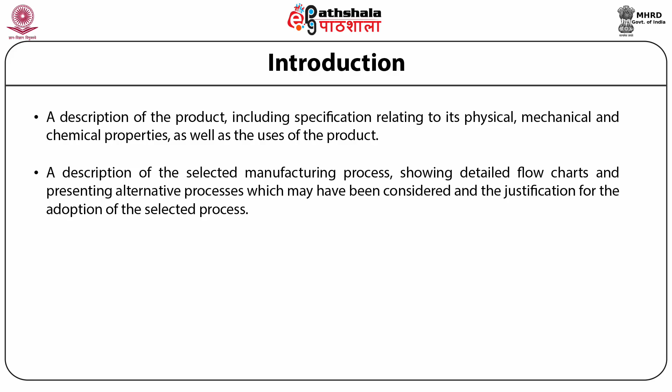A description of the selected manufacturing processes showing detailed flow charts and presenting alternative processes which may have been considered, and the justification for the adoption of the selected process. A determination of the plant size and the production schedule.

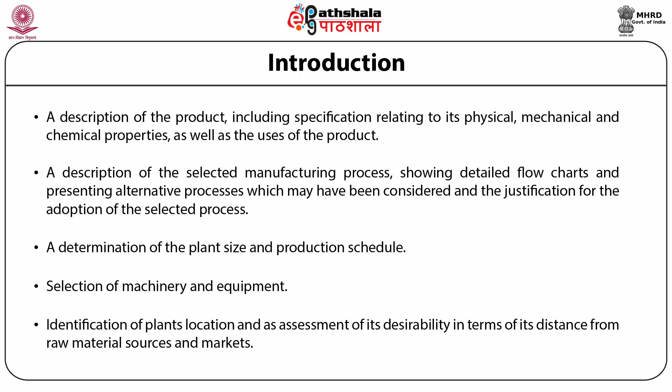Selection of machinery and equipment. Identification of plant location and an assessment of its desirability in terms of its distance from raw material sources and markets. A design of the plant layout and an estimate of the cost of erection of the proposed buildings and land improvements.

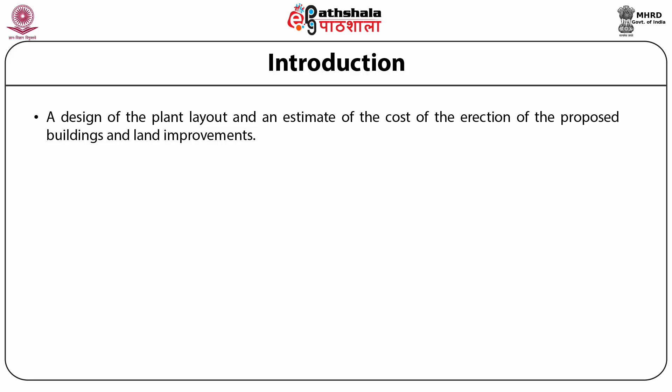A study of the availability of raw materials and utilities, including a description of physical and chemical properties, quantities needed, current and prospective costs, terms of payment, and location of sources of supply.

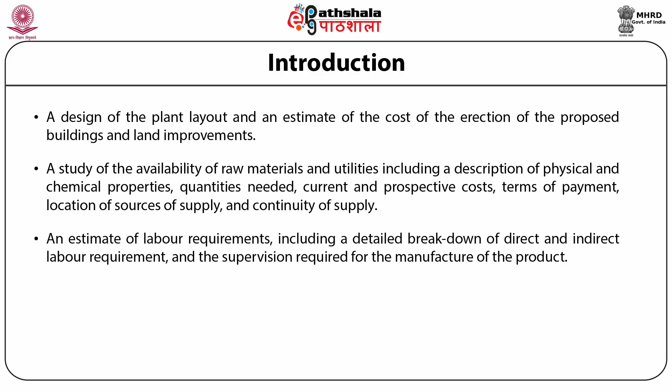Continuity of supply. An estimate of labor requirements, including a detailed breakdown of direct and indirect labor requirements, and the supervision required for the manufacture of the product.

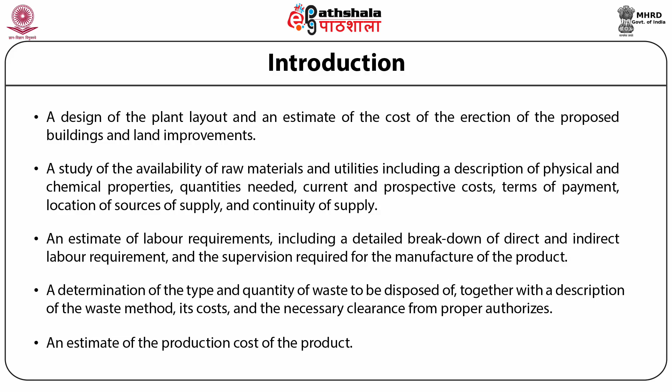A determination of the type and quantity of waste to be disposed of, together with a description of the waste disposal method, its costs, and the necessary clearance from proper authorities. An estimate of the production cost of the product.

Technical appraisal: technical feasibility assesses the technical viability for coming to a conclusion as to whether it fulfills the expected norms or not. Technical appraisal involves the critical study of the following aspects: material inputs and utilities.

This aspect is concerned with defining the materials and utilities required, specifying their properties in detail, and setting up their supply program. Material inputs and utilities may be classified into four broad categories: raw materials, processed industrial materials and components, auxiliary materials and factory supply, and utilities.

Raw materials may be full or semi-processed. They can be further grouped into agricultural products, mineral products, livestock and forest products, and marine products.

Processed industrial material and components. These represent important inputs for a number of industries that include base metals, semi-processed materials, manufactured parts, components, and sub-assemblies. To get authentic and sufficient information, answers to the following questions must be sought.

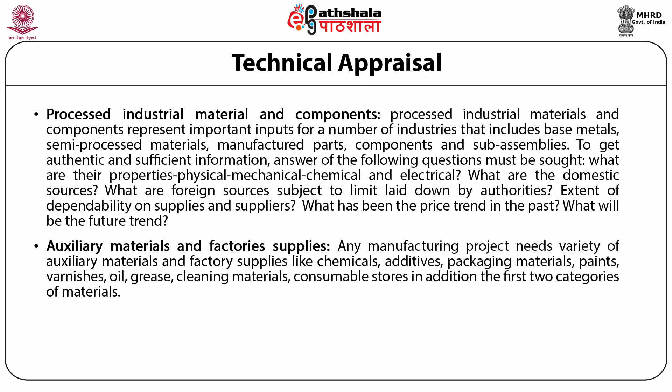Auxiliary materials and factory supply. Any manufacturing project needs a variety of auxiliary materials and factory supplies like chemicals, additives, packaging materials, paints, varnishes, oil, grease, cleaning materials, and consumable stores, in addition to the first two categories of materials.

Utilities stand for power, water, steam, fuel, and gas, which play a constructive role in converting raw materials into end products. Correct assessment of these in terms of location, technology, plant capacity, and the like is a must.

These utilities turn critical at times and become a limiting factor in achieving the highest level of efficiency or lowest level of cost.

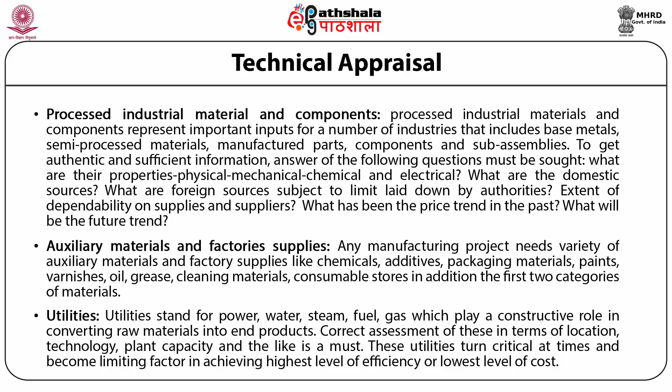Manufacturing process or technology. The methodology used in converting materials into final products is known as a technology. For manufacturing a product, there are alternative technologies.

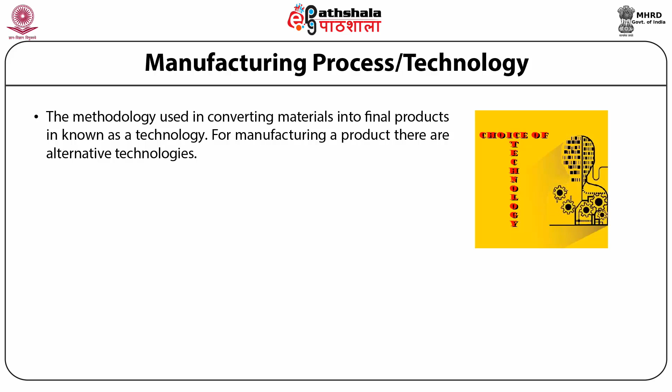To manufacture steel, either open hearth process or Bessemer process can be used. That represents a technology. In making cement, the possible processes are wet or dry.

These technologies are always changing from good to better and from better to best. Even what is today the best can be superseded in case something better is made available. Research and development efforts make the best possible, because even the very best can be improved upon over a period of time.

Feasibility study, especially technical, is to focus its attention on the significant aspects of choice of technology, acquisition of technology, and the appropriateness of the technology.

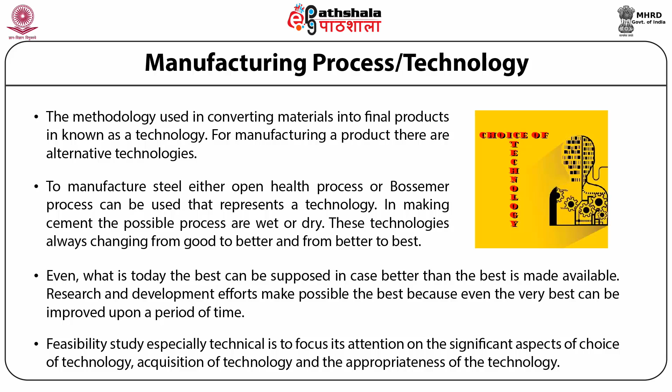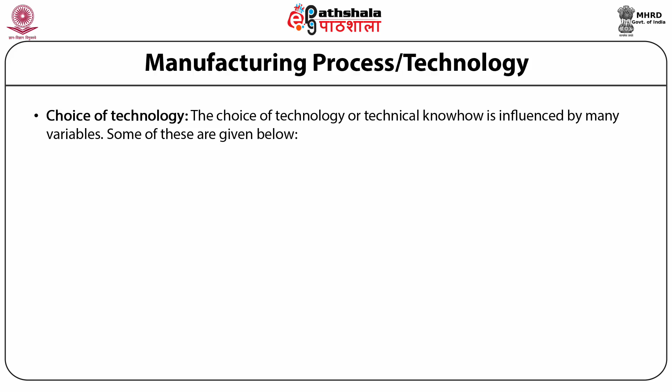Choice of technology. The choice of technology or technical know-how is influenced by many variables. Some of these are plant capacity. Plant capacity and manufacturing technology are closely related with one another. In order to meet a given plant capacity requirement, only a specific production technology may be viable.

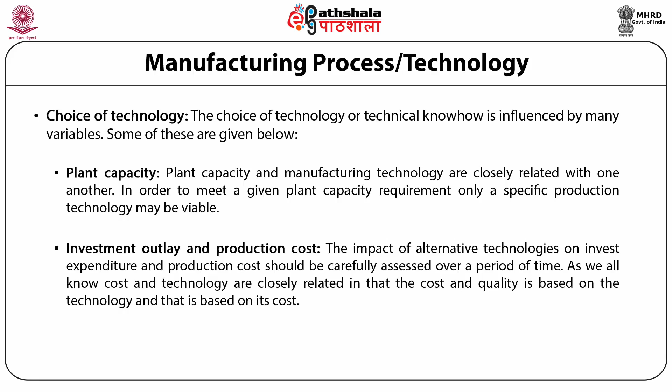Investment outlay and production cost. The impact of alternative technologies on investment expenditure and production cost should be carefully assessed over a period of time. As we all know, cost and technology are closely related, in that the cost and quality is based on technology, and that is based on its cost.

Major inputs. Basic inputs play a significant role in choosing a manufacturing technology. For example, in manufacturing of cement, the quality of limestone decides whether the manufacturing unit should go in for wet or dry processing.

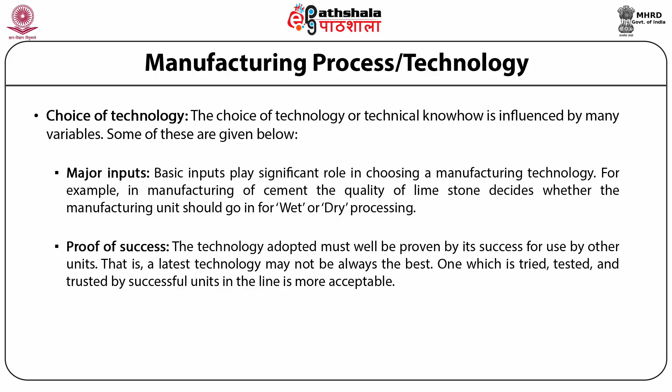Proof of success. The technology adopted must be well proven by its success for use by other units. That is, the latest technology may not always be the best. One which is tried, tested, and trusted by successful units in the line is more acceptable.

Latest advancement. The technology adopted is one which is the latest, or which is adaptable for updating easily with least cost and time. The product mix.

Product mix stands for the main products, co-products and byproducts that result from use of a particular technology.

Ease of absorption. Technology, however latest and effective, has no meaning unless it is easy to be absorbed by the company. Very often, it so happens that high-level technology may not easily percolate to the absorbing firm due to some reason or reasons.

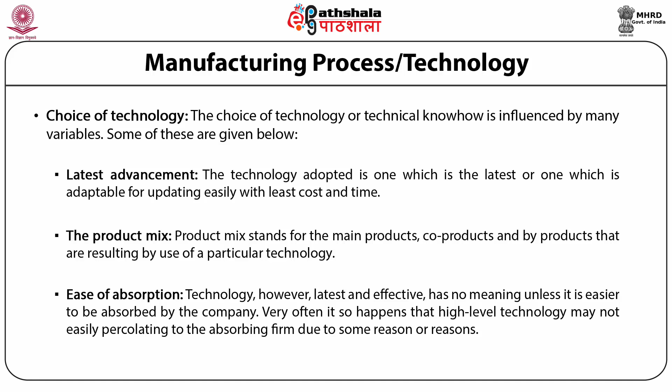Acquiring technology. If technology is available openly, then the detailed information can be obtained even at the feasibility stage. In case the know-how is available with the owner, then this step, that is evaluation of process, can altogether be eliminated.

And if the know-how is not available with the owner, it has to be acquired from outside sources such as foreign collaborators, consultancy organizations, machinery suppliers, promoters' knowledge and experience, and recruitment of suitable personnel.

The acquisition of technology from some other enterprise may be possible through technology licensing. This is the most popular way of acquiring technology. Under this arrangement, the technology licensor gives the licensee the right to use the patented technology and get the concerned know-how on a mutually agreed basis.

The supplier of technology generally provides a technology package which may consist of some components which are not essential. Therefore, it becomes essential to break the package into component parts such as technology, proper engineering services, supply of intermediate products, and supply of equipment by the licensor, use of the trade name, among other things.

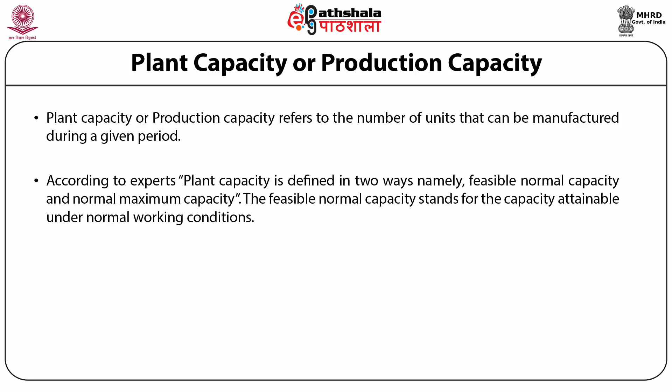The feasible normal capacity stands for the capacity attainable under normal working conditions. This is established on the basis of installed capacity, technical conditions of the plant, normal stoppages, downtime for maintenance and tool changes, holidays and shift patterns.

Whereas normal maximum capacity is the capacity which is technically attainable, and this normally corresponds to the installed capacity guaranteed by the supplier of the plant.

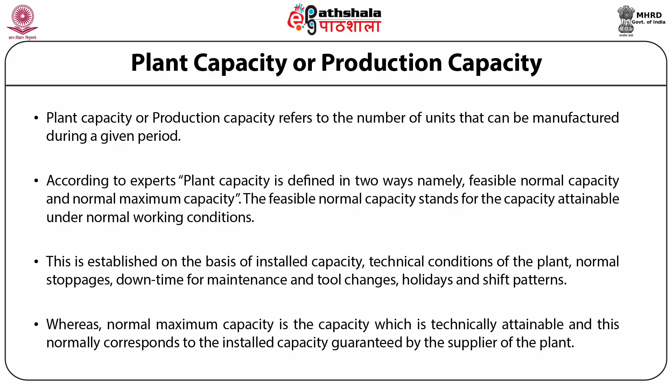Manpower requirement. Requirement of manpower of different skills, both for construction stage and operational stage, should be assessed based on phasing of project execution and completion. The requirement of people should be assessed category, operation and function wise.

The assistance of a consultancy company for recruitment of staff with the desired skills and qualification may be sought if needed. The object should be to ensure the availability of adequate manpower for future operation and to avoid overstaffing at any stage of project execution. Adequate provision of funds for the training of key personnel with a time-bound program should be estimated beforehand. The introduction of a scheme of productivity-linked incentive or bonus may be kept in mind.

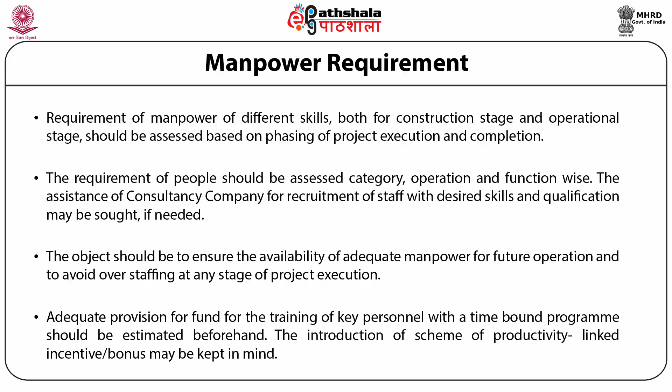Plant location and site. Location refers to a fairly broad area like a city, an industrial zone or a coastal zone, and site refers to a specific piece of land where the project would be set up. Plant location includes selection of a requisite region, credible community and suitable site.

Selection of region is a broad decision. For selection of proper site, a survey may be conducted and both monetary and non-monetary factors should be looked into. The choice of location is influenced by a variety of considerations such as raw material supplies, proximity of supplies, communication and transport facilities, manpower, labor laws, and government policy, taxes and fees, etc.

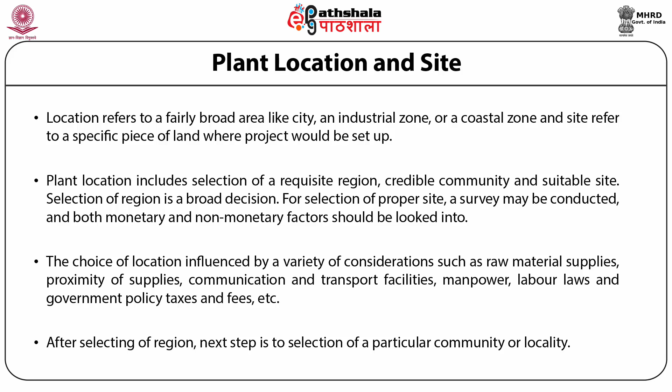After selecting a region, the next step is selection of a particular community or locality. The selection of a community or locality calls for rigorous factors like quality and quantity of labor force, banking and credit facilities, local taxes, rents, rates and insurance charges, political stability, extent of state assistance, and many more.

The final round of selection is selection of site or space where the industrial plant is going to be located. The important factors that decide the choice of a suitable site are price of land, the type of soil, ease of waste disposal, people's attitude, existence of religious and social institutions, etc.

Taking all these factors, the most advantageous location is that where the cost of gathering material and fabricating it, plus the cost of distributing the finished product to the consumer, is the least.

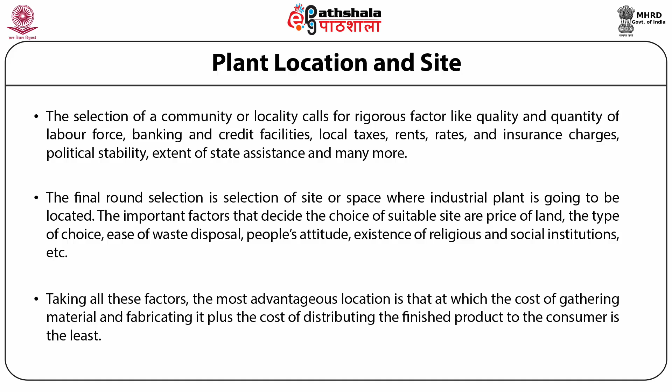Machinery and equipments. It is the technology that determines the exact requirement of machinery and plant capacity. It is also influenced by the type of project. For a process industrial plant, say a petrochemical unit or pharmaceutical unit, the machineries and equipment required should be such that the various stages of manufacture are matched well.

To determine the kind of machinery and equipment required for a manufacturing industrial plant, the following procedure is generally followed: estimate the likely levels of production over a given period of time, define various machines and operations, calculate machine hours required for each type of operation, and select machineries and equipments required for each function.

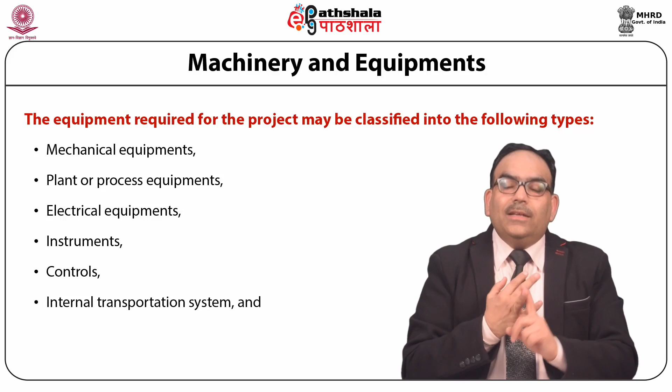The equipment required for the project may be classified into the following types: mechanical equipments, plant or process equipments, electrical equipments, instruments, controls, internal transportation system, and earth moving and construction equipment and others.

While selecting machines and equipments, some possible constraints should be kept in mind, like shortfall of electricity, lack of cooperation on the part of employees when they are meant to adopt advanced technology or numerical control of machines, and hurdles in moving equipment or divided plant to remote places.

Structure and civil work. For the proper execution of civil work in the proposed project, the essential steps are defining the scope of work with respect to site preparation, construction of roads and buildings in factory and residential areas, and construction of sewerage lines and other civil works. Preparing cost estimates, selecting agencies to be hired for construction, and preparing plans, charts, and drawings.

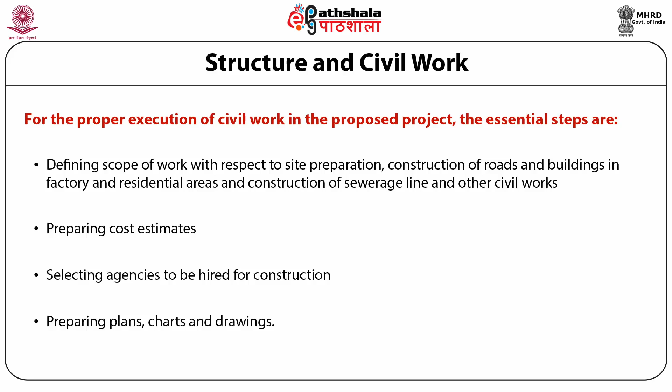Civil work can be further divided. Site preparation and development involves a set of activities, namely grading and leveling of site, demolition and removal of existing unwanted structures, relocation of existing pipelines, cables, roads, power lines, reclamation of swamps and draining and removal of stagnant water, connection of utilities from the site to the public network.

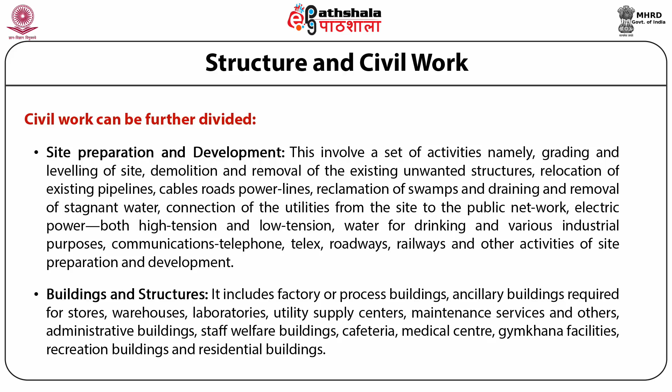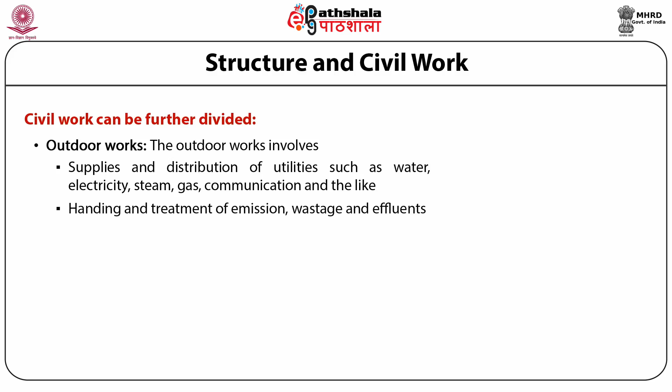Outdoor works involve supplies and distribution of utilities such as water, electricity, steam, gas, communication, and the like. Handling and treatment of emission, wastage, and effluents.

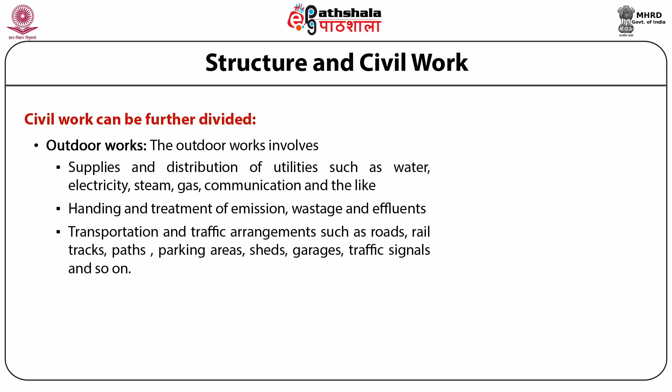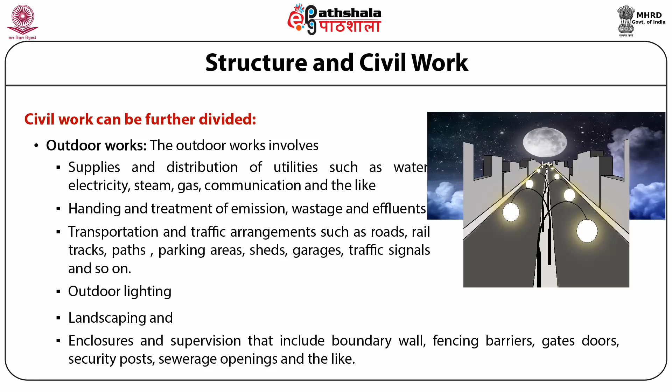Transportation and traffic arrangements such as roads, rail tracks, paths, parking areas, sheds, garages, traffic signals, and so on. Outdoor lighting, landscaping, and enclosure and supervision that include boundary wall, fencing, barriers, gates, doors, security posts, sewerage openings, and the like.

Project charts and layouts. When data is collected on major dimensions of the project, that is on market size, plant capacity, production technology, machines and equipment, building and civil works, then project charts and layouts are prepared. These charts and layouts define the scope of the project and provide the basis for detailed project engineering and estimation of investment and production costs.

General functional layout, transport, utility consumption, communication, organization, plant material flow, and production line diagram are the major charts and layouts. General function layout shows the general relationship between equipment, building, and civil work. Utility consumption diagram shows the principal consumption points of utilities and their required qualities and quantities.

Transport layouts show the distances and means of transport outside the production line. Communication layouts show how the various parts of the project will be connected with telephone, telex, intercom, and fax, etc. Plant layouts show the physical layout of the factory, equipment, dimensions, provision for material handling, level of computerization, nature of process, etc.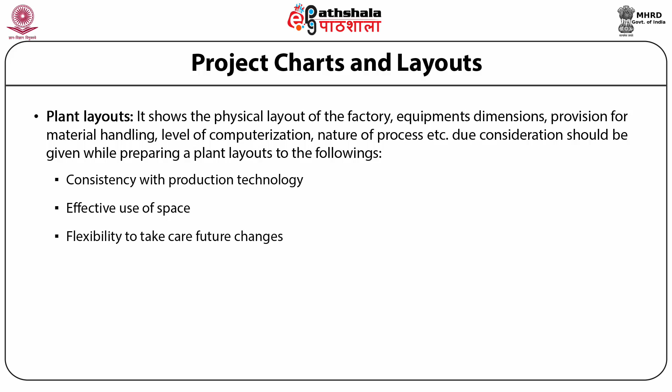Due consideration should be given while preparing plant layouts to the following: consistency with production technology, effective use of space, flexibility to take care of future changes, smooth flow of goods from one workstation to another or one stage to another, and safety to the workforce.

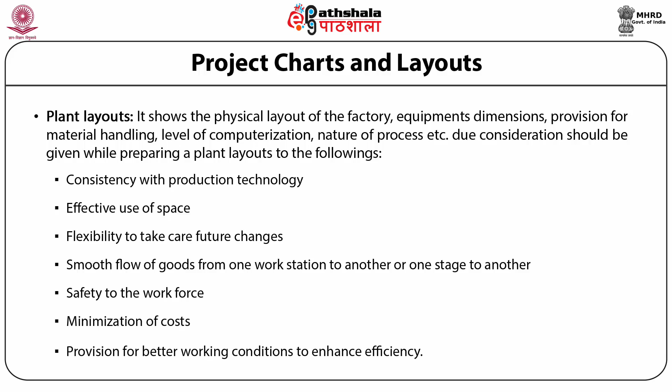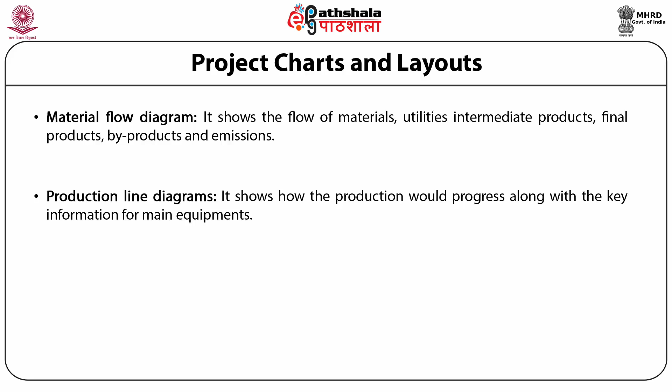Minimization of costs, provision for better working conditions to enhance efficiency. Material flow diagram shows flow of materials, utilities, intermediate products, final products, byproducts, and emissions. Production line diagrams show how the production would progress along with the key information for main equipment.

Work schedule is the plan of work relating to installation and initial operation. The purpose of the work schedule is to anticipate problems likely to arise during the installation phase and suggest possible means for coping with them.

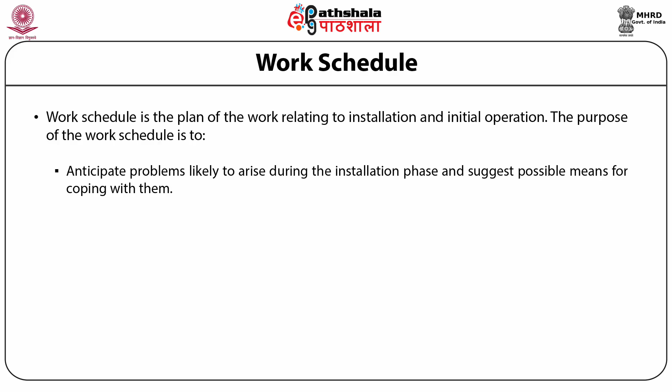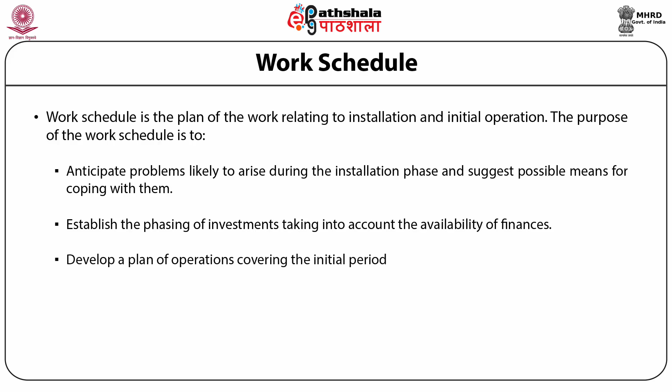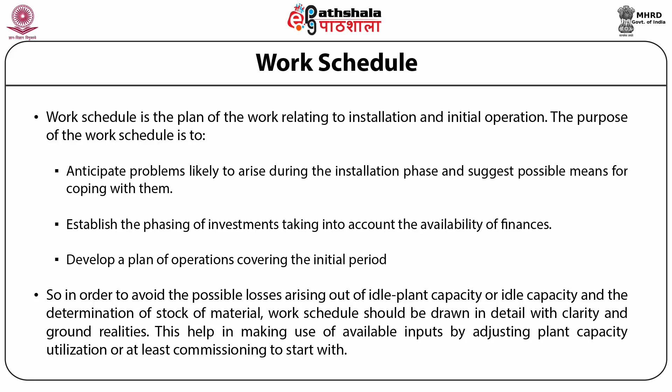Establish the phasing of investments, taking into account the availability of finances. Develop a plan of operations covering the initial period. So, in order to avoid possible losses arising out of idle plant capacity and the determination of stock material, the work schedule should be drawn in detail with clarity and ground realities. This helps in making use of available inputs by adjusting plant capacity utilization, or at least commissioning to start with.